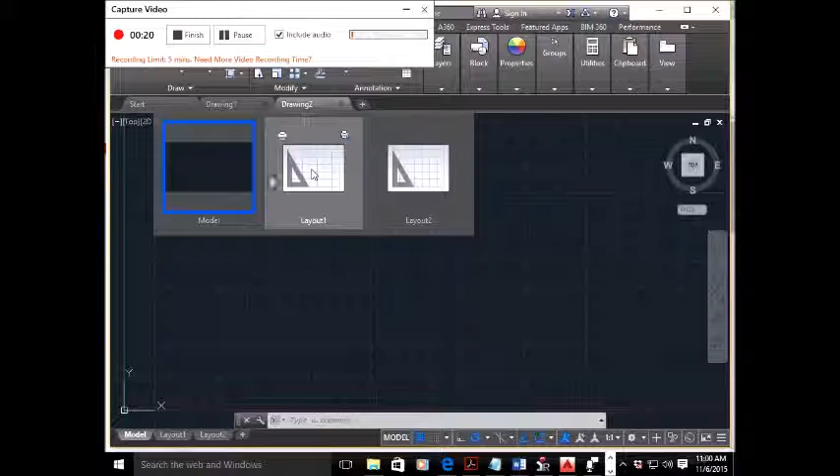When you click the plus icon, the dashboard appears, allowing you to start a new drawing or open an existing one. Right-click on the plus icon, and a context menu opens that offers you the option to open an existing drawing, to save all of the currently open drawings, or to close all of the drawings. If you hover over the drawing tab, you'll see preview images of the model and layouts of the drawing. You'll learn more about model and layout spaces later in this chapter.

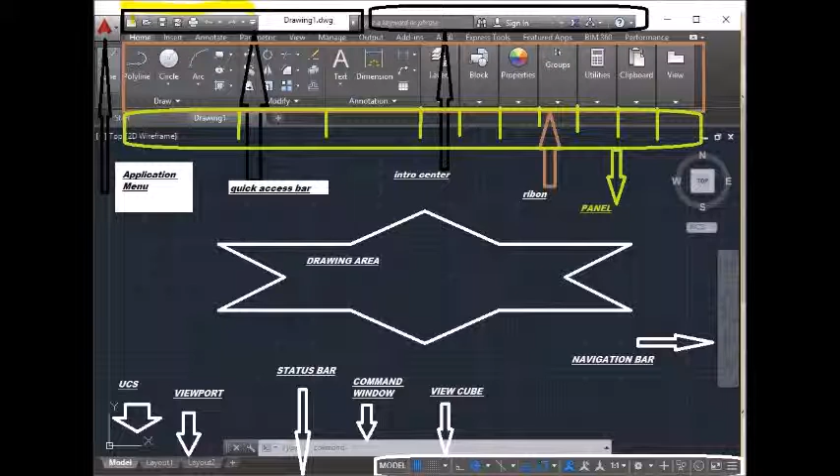Within the drawing area, you see several items along the side and in the corners. The UCS icon appears in the lower left corner. You'll learn more about the UCS icon in a moment. In the upper right corner, you see the ViewCube. The ViewCube is primarily for 3D modeling, and we look at 2D drawings.

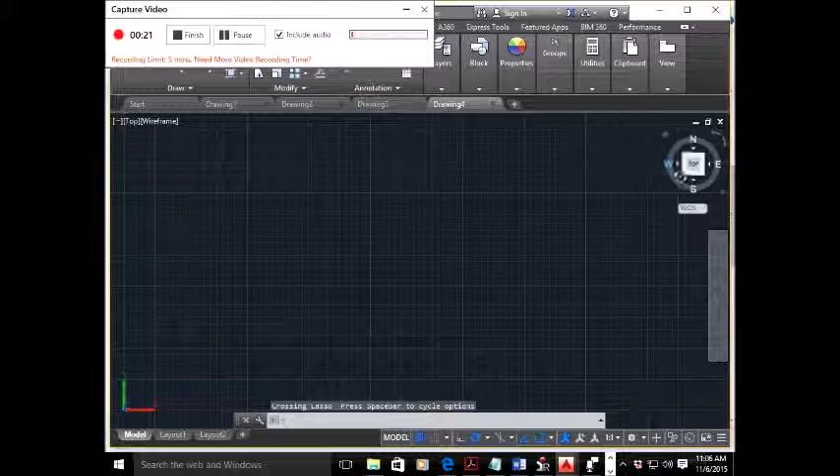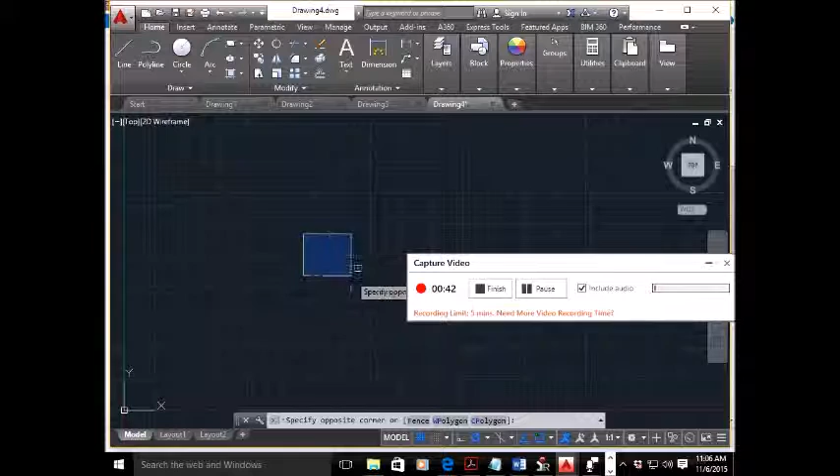You'll also see a navigation bar along the right edge of the AutoCAD window. This bar offers tools you can use to get around in your drawing. Basic tools like zoom and pan can be found here, as well as some advanced tools for viewing 3D models. The viewport controls in the upper left corner of the drawing area offer menu options to control 3D and 2D views and visual styles, and duplicate some of the functions of the ViewCube.

Just below the drawing area in the lower left corner are the Model and Layout tabs. These tabs enable you to switch quickly between different types of views called the Model and Layout views. You'll get to see firsthand how these work in a section called Working with AutoCAD later in this chapter.

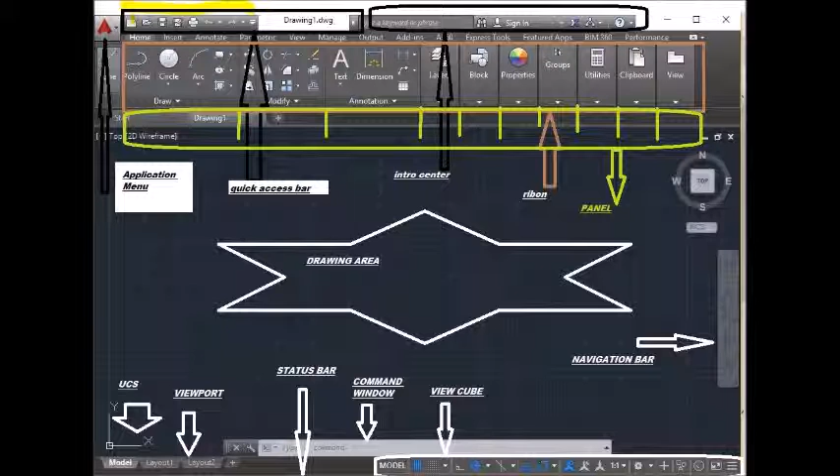The command window, located just below the drawing area, gives you feedback about the AutoCAD commands as you use them. You can move and resize this window just as you move and resize other display components. By default, the command window is in its undocked position. We'll elaborate on the command window in the section Working in the Command Window later in this chapter.

Using the application menu. The application menu offers tools to help you manage your AutoCAD files. It is basically the File pull-down menu from previous versions of AutoCAD. Try it out to see how it works. Click the application menu icon in the upper left corner of the AutoCAD window. A list of options appears. Move the cursor slowly down the list of options in the left column. As you highlight the options, additional options appear in a column to the right.

Highlight the export option to see the various formats available for export.

The application menu also gives you a convenient way to find recently used files or to get to a file you already have open. If you move your cursor away from the list of options to the left in the application menu, you'll see recent documents in the upper left portion of the menu. You'll also see two icon tools, named Open Documents and Recent Documents.

You can use the View tool in the upper right portion of the application menu to select the way the list of files is displayed, in a manner similar to the way you would use the Windows Explorer View option.

You can click this icon and select small images to have the list display the files with thumbnail images of their content. Hover over a file name and you will see a tooltip that displays a larger thumbnail of the drawing.

This is where you'll be selecting tools to draw, edit, or perform other functions. The ribbon contains a set of panels representing groups of tools and features. The name of each ribbon panel is found in its title bar at the bottom of the panel. Ribbon panels are further organized by the tabs that appear above them.

Each tool in the ribbon offers a tooltip and cue card that provides a short description to help you understand what the tool icon represents.

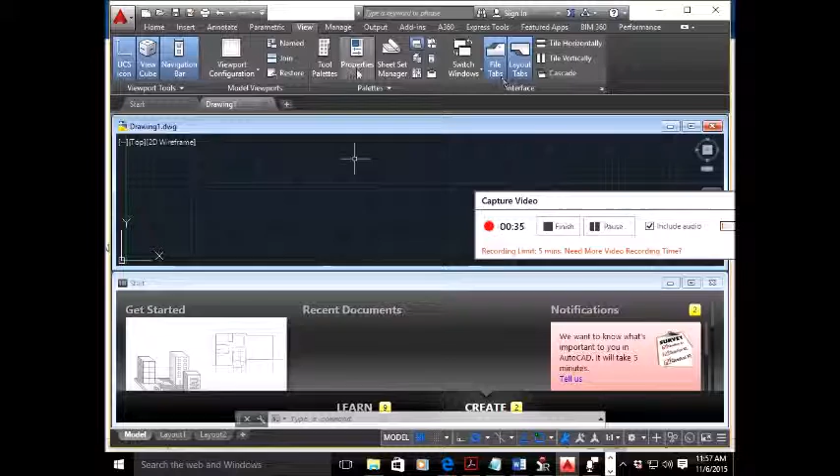If you see only the ribbon tabs, click the arrowhead button in the ribbon control tool. If you don't even see the tabs, type ribbon.

Move the arrow cursor onto one of the ribbon panel tools and leave it there for a moment. You'll see a tool tip appear just below the cursor. Hold the cursor there a bit longer and the tool tip changes to give you even more information about the tool. In most cases, you'll be able to guess what each tool does by looking at its icon.

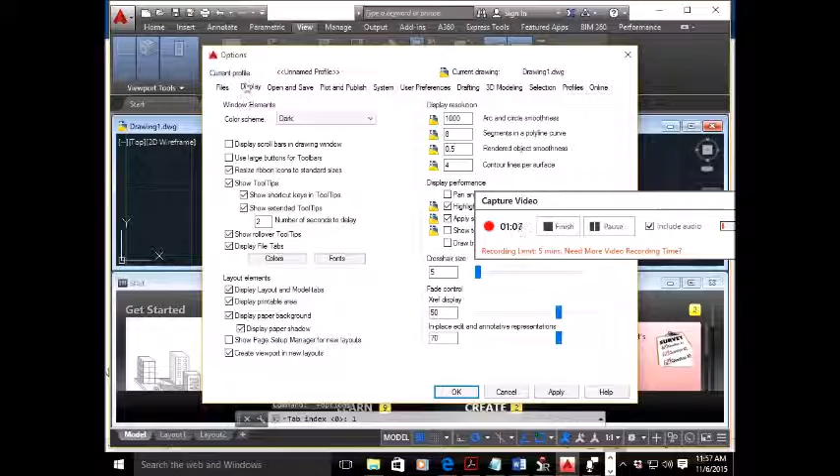The icon with an arc in the Draw ribbon panel, for instance, indicates that the tool draws arcs, the one with the circle shows that the tool draws circles, and so on. For further clarification, the tool tip gives you the name of the tool.

Move the cursor around in the drawing area. As you move it, notice how the coordinate readout changes to tell you the cursor's location. It shows the coordinates in an X, Y, Z format.

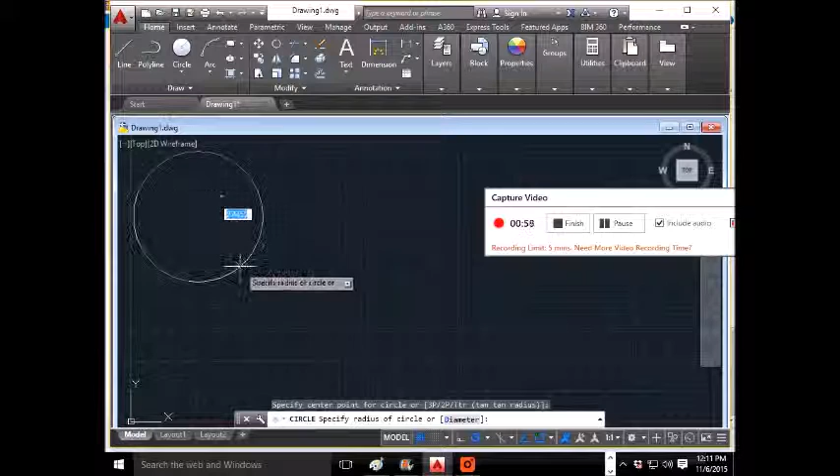Place the cursor in the middle of the drawing area and click the left mouse button. Move the cursor and a rectangle follows. This is a window selection.

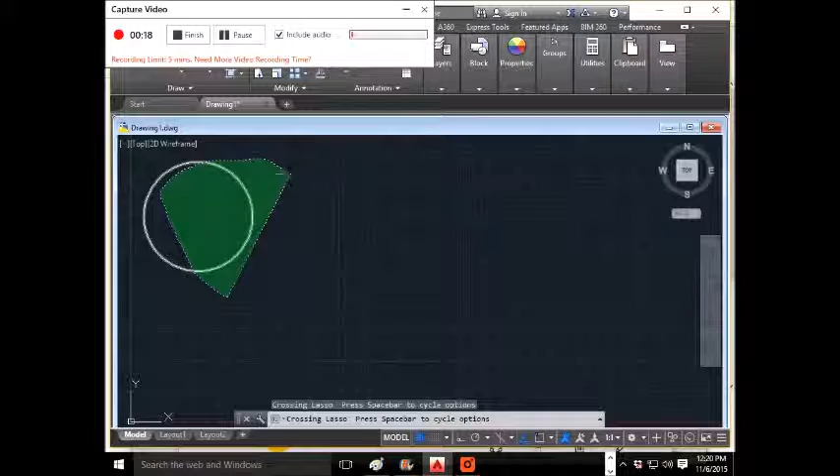On left click, the circle is selected, shown with blue dots. If we click the delete key on the keyboard, the circle will be deleted. In this way, we can select multiple objects in the drawing area and delete them all at once with a single click.

Place the cursor in the middle of the drawing area and click the left mouse button. Move the cursor and a rectangle follows. This is a window selection.

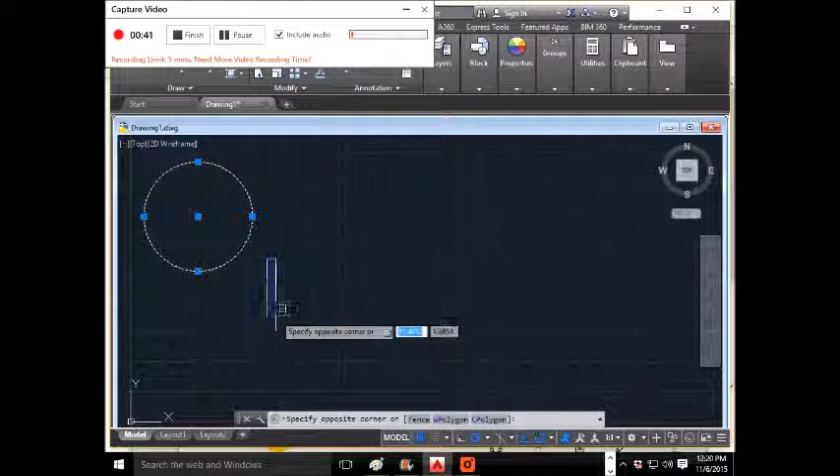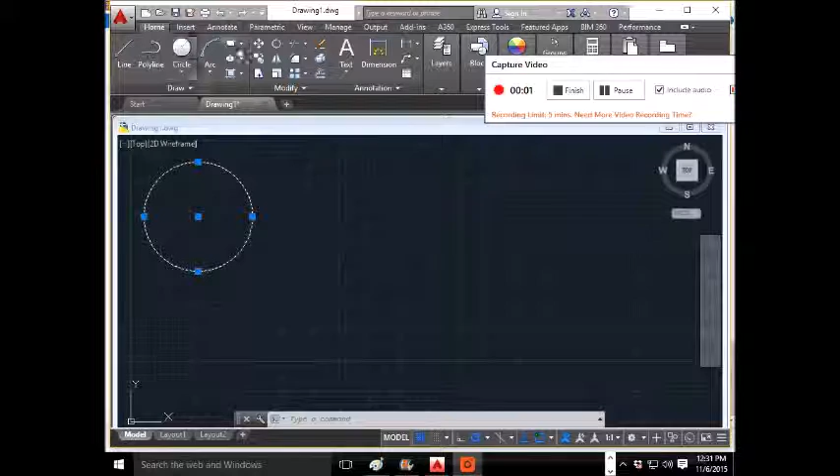Move the cursor a bit in any direction, then click the left mouse button again. Notice that the window selection disappears, as does the dynamic input display. Try picking several more points in the drawing area. Notice that, as you click, you alternately start and end a window selection.

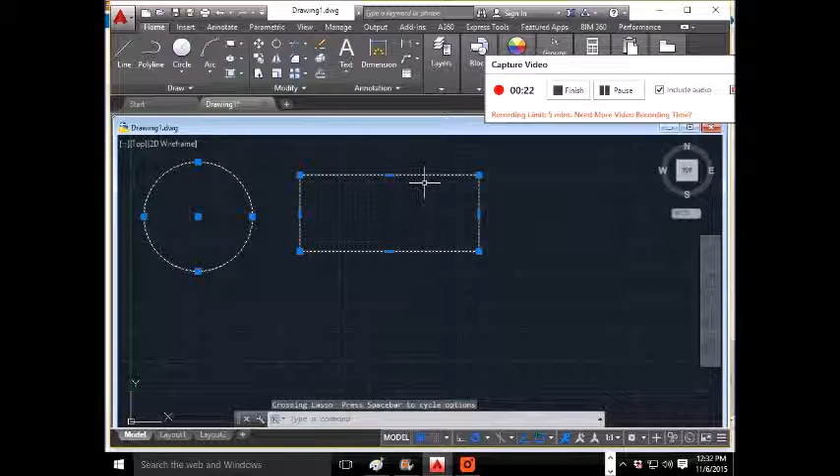If you happen to click the right mouse button, a context menu appears. A right click frequently opens a menu containing options that are context sensitive. This means the contents of the menu depend on the location where you right click, as well as the command that is active at the time. If there are no appropriate options at the time of the right click, AutoCAD treats the right click as an enter keystroke.

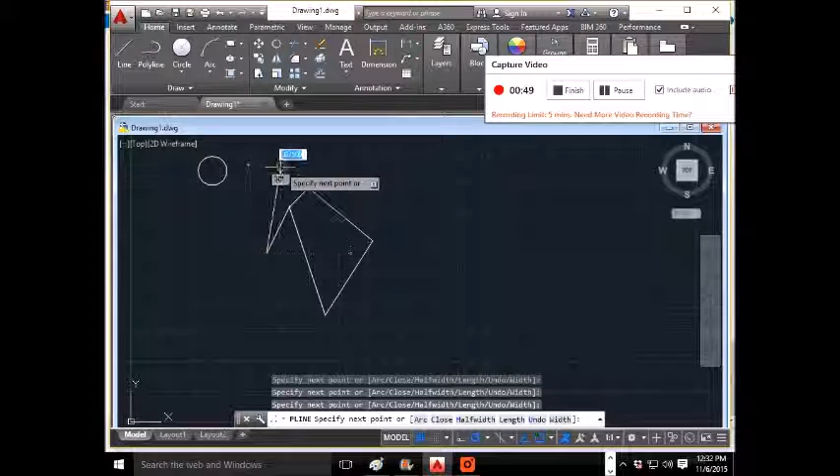In the lower left corner of the drawing area, you see an L-shaped line. This is the user coordinate system, or UCS, icon, which tells you your orientation in the drawing. This icon becomes helpful as you start to work with complex 2D drawings and 3D models. The X and Y indicate the X and Y axis of your drawing.